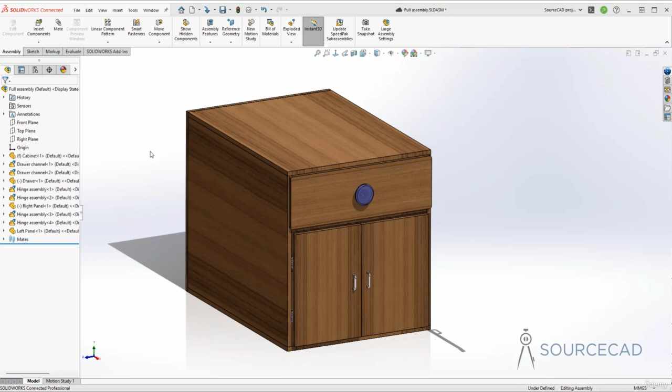So to add a simple component, I'm just going to open this door here, and maybe this one too. All right, and here, as you can see, we have these hinges which are completely attached as if glued together. But of course, we need to add the screws here.

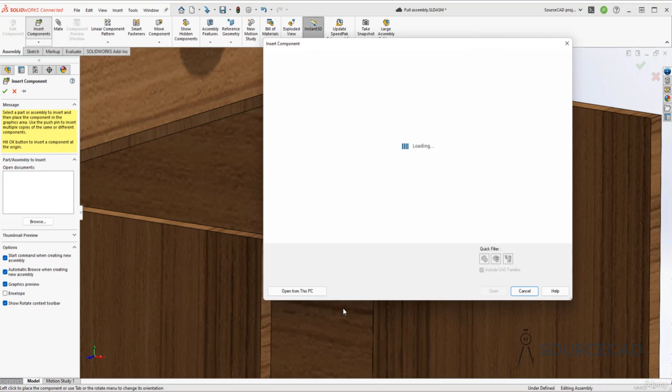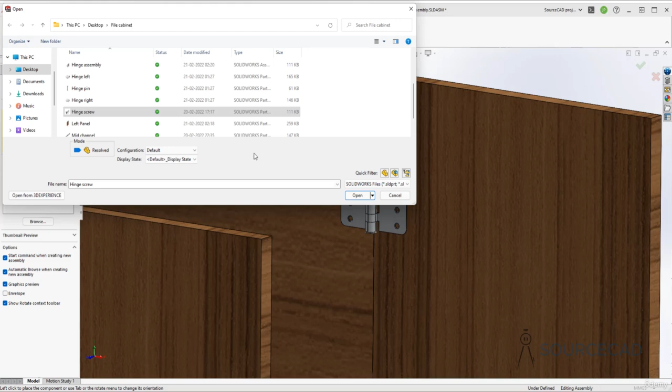So let's add the screw. For that, I'll go to Insert Component, and from the same folder, which is File Cabinet, I'm going to add the hinge screw. So in this case, we have the hinge screw right here. Now this hinge screw contains just one single configuration, and you can see that right here. In the configuration, if you click this dropdown, you'll find just one single configuration that's default, and always every component is going to have one configuration that's the default one. So with that, I'll just click open and add it right about here.

So that's the simple screw. Now let's just add it. To add it, I'm going to use the Smart Mate. So I'll just select this face, press and hold the Alt key and move it right here, and it will automatically apply the concentric snap, or the concentric mate. I'll click OK, and we are done.

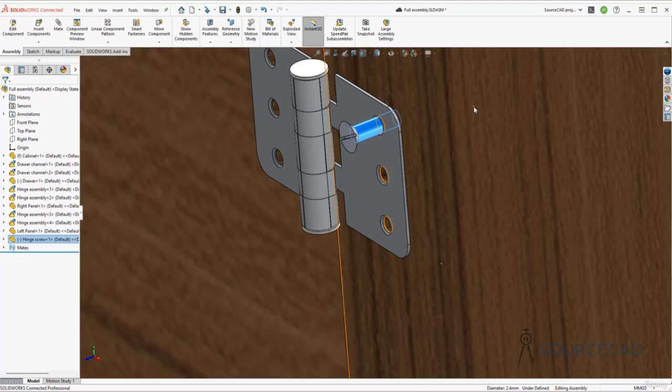Now we can also make this circle coincident on this one. So Control-select this one and just make it coincident. All right, and that's done. So that's how you can add a simple component here, and we've been doing that for quite some time now.

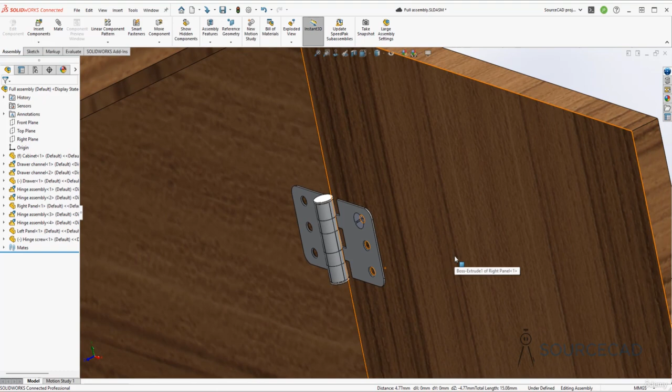Now, in a similar way, we can add screws for all of these other components, but this one is a simple component with no configuration. And here, as you can see, it's not even moving outside—it's just long enough to sit inside this panel board.

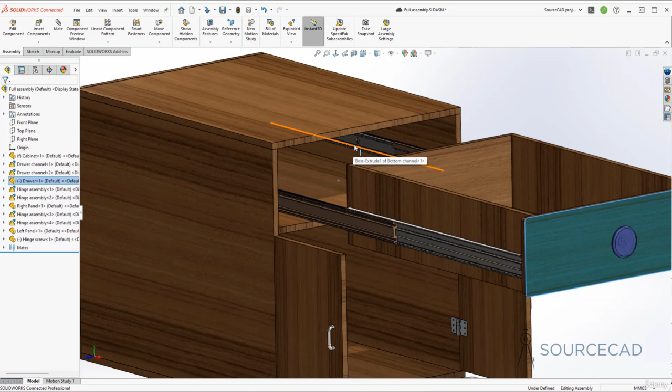But what if you want to use a single screw for several purposes? For example, if we want to use just one single screw for this and also the same screw for these drawer channels. Here also you can see we have all these holes where we just need to add screws and bolts. For that, you can just make one single screw and use it everywhere using configurations. So let's add one more screw that can be used here.

This one contains two configurations. So I'll go to Insert Component, and again, in the same folder, we have the drawer screw right here. This one contains two configurations: the first one is default and the second one is small. So we have two configurations. I'm just going to select default once again, but you can start with the small configuration as well.

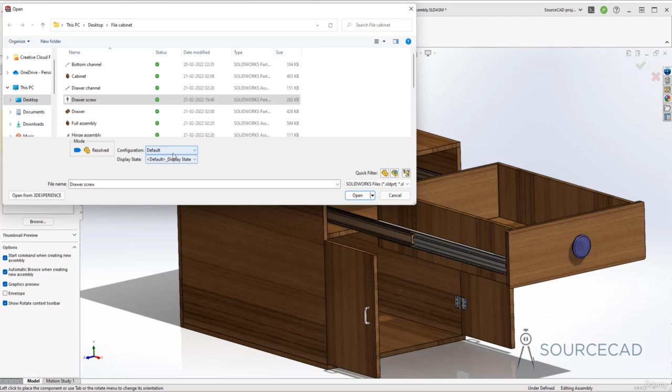So with default, I'll just click open and add this screw maybe right here. Okay, so that's added. Now I'll also hide this cabinet—I'll go to this cabinet and select Hide Component so that we can see what's going on inside. And now I'm going to add it on these holes.

Now to add it, once again, you can use the Smart Mate. So select this face, press and hold the Alt key, and move it all the way up to this hole. Now when you do so, it should automatically let you snap, but it's not doing that, so I'm going to zoom in a little bit and repeat it one more time. I'll just move it, and right here, now we have the concentric one. So let go, and it is automatically applied. Click OK. All right, so that's done.

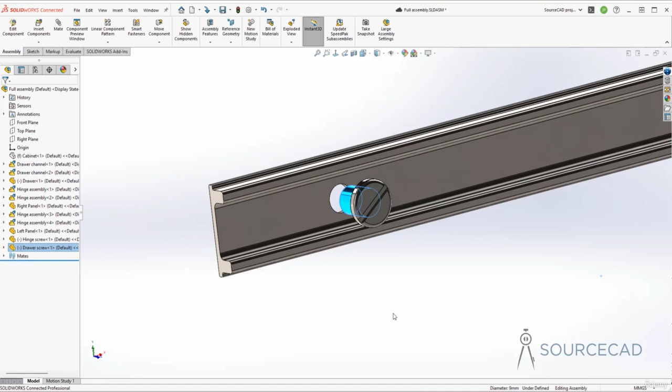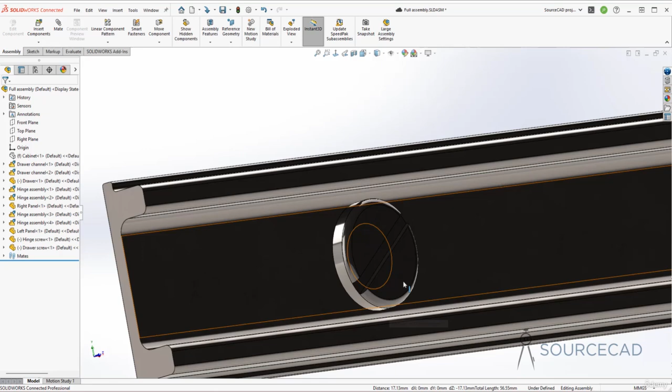Now we'll add once again the coincident mate. So I'll select this circle, that edge, and Control-select this edge, and apply the coincident one. All right, now it's in its place and properly added as well. But this one, as you can see, is quite big and it's actually overlapping this fillet, so it's certainly not a screw for this channel—we need to use its smaller configuration.

Now, if you want to use its smaller configuration, then select the drawer screw and just change it. So to change the configuration, select it, then go to Properties, and here you can see all the configurations built into this. So this is the default, and then we have a small one. Select small, click OK, and we are done.

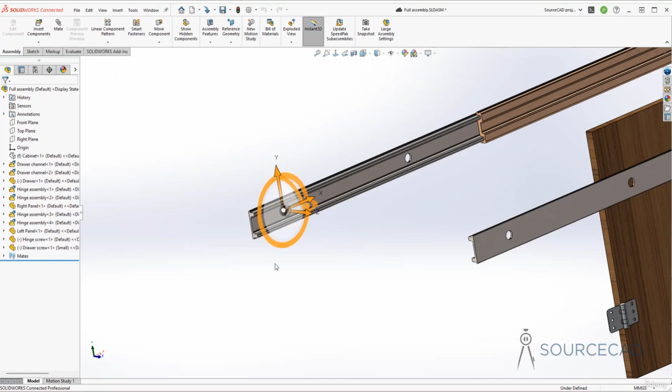Now we have the smaller version of the same screw, and it's not even overlapping the fillets. So that's the one which we need. Now, depending on the requirement, you can use the same screw for different situations if you've built several configurations into it, and this smaller one is just long enough to remain inside the board as well.

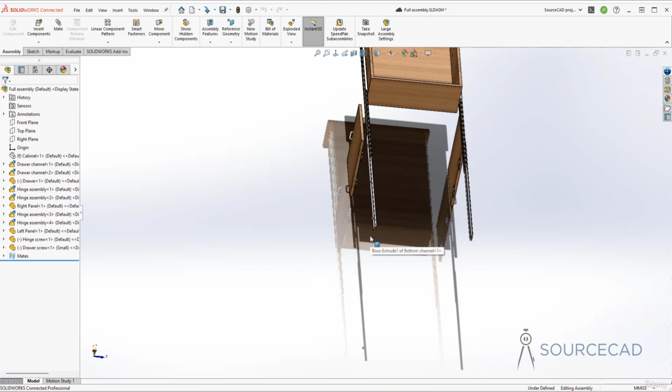So I'm just going to bring back the board, and here it is—it won't even go outside this board. So this perfectly fits it, and in a similar way you can add a screw for all of these holes.

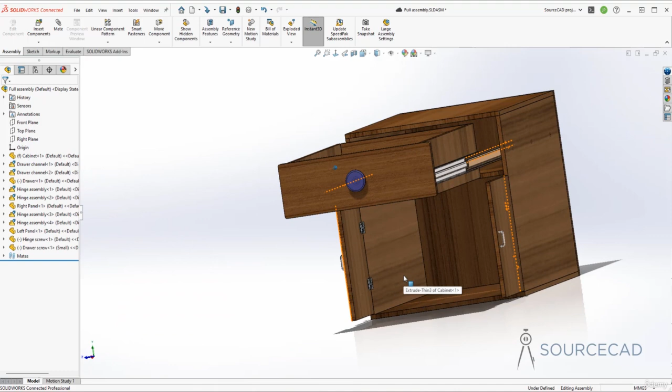So we have added it just for one, but you can add it here, and you can add the one for this one as well, simply by hiding all of these channels, then adding the screw and bringing it all back together. And you can do the same for all of these extra holes. So in this way you can use components that contain several different configurations in your assembly.